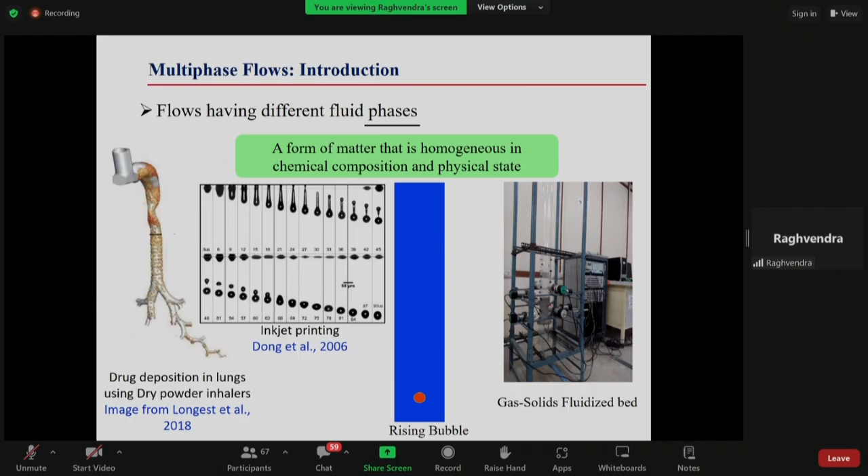That brings us to another set of reactors, called bubble column reactors. The bubble column reactor is a workhorse in the chemical industry, and I've introduced it here because it has a very simple structure that anybody can imagine. You have a column, where the blue color represents the liquid, and through a sparger, gas is introduced. So you have a pipe from where the gas is coming, and by some means you are distributing the gas at different points. It might be a plate, different holes in pipes, or a ring pipe — this is called a sparger — and from this you introduce the gas.

Depending on the gas flow rate, you can have a number of bubbles. The idea here is that when one needs to do gas-liquid reactions, in the pharmaceutical industry or chemical processing industry, this configuration provides a large interfacial area between the two phases, gas and liquid, which is where the reaction happens.

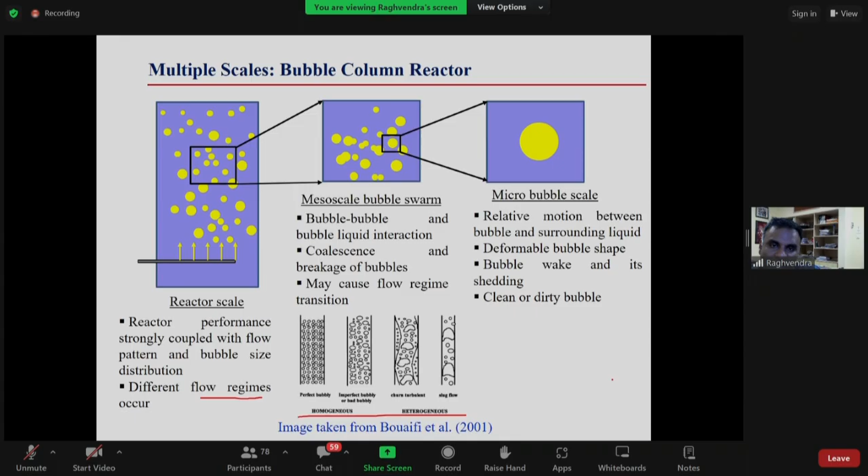So one needs to know that at what gas flow rates we will get what flow regime, and then you can model it accordingly, right?

So if we define multi-phase flows, they are complex and they involve interaction between different entities. Multi-phase means there can be more than one phase. It can be, say, gas and liquid phase. It can be liquid and liquid phase where these phases are immiscible.

So, for example, oil and water can be a multi-phase flow. And there can be gas and solid flow, there can be liquid and solid flow, or there can be gas, solid, liquid flow, or gas and liquid, or more than two liquids. So there can be different combinations.

Typically, what you will have is that one phase will be continuous and another phase will be dispersed into it. So you will have, for example, in the bubble column reactor, a continuous stream of liquid phase, and in that you have gas bubbles dispersed into it. So gas is the dispersed phase in the bubble column reactor, and the liquid is the continuous phase.

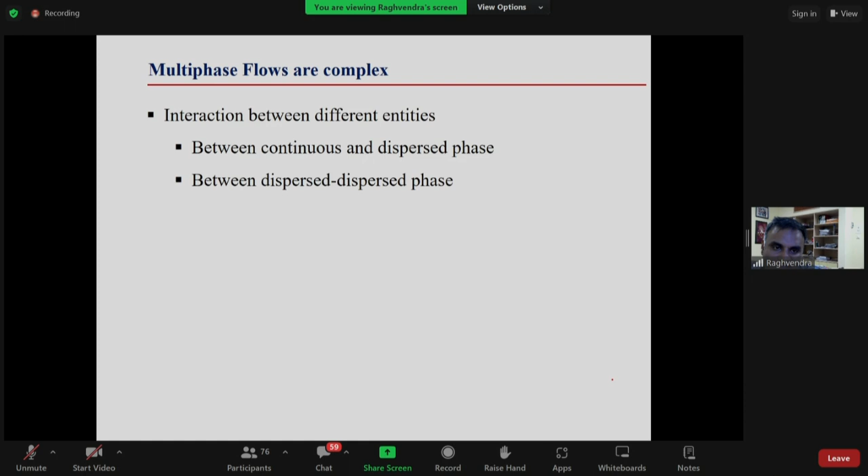Then you will have interaction between dispersed phases, so you will have interaction between bubbles. Now, most of these systems that we use in chemical engineering applications, or in any application, for example in conventional industry, the flow is turbulent. And turbulence you might have studied or heard about in a few previous lectures, if I am correct.

Then apart from the single phase turbulence factors, you need to also take into account particles and their motion. When I say particle, it might be solid particles, or it might be bubbles, or it might be droplets. How do they affect turbulence and how does the turbulence affect them? So the two-way interaction of turbulence and particles will need to be taken into account in your models.

The particle shape: most of the models that we have as of now assume the particle shape to be spherical, or they use correlations which have been developed for spherical particles with a correction factor for the shape. So that is irregular particle shape. The particle size will not be the same, so one needs to know the particle size distribution.

And then, as I showed you in the previous slide, there are different flow regimes, homogeneous bubbly flow or the bad bubbly, where you have smaller and bigger bubbles, churn flow and slug flow. So depending on the flow regime, your modeling strategy will change. So the transition between flow regimes is another challenge that needs to be modeled, because it might be difficult to use the same single approach to model all the flow regimes. And when you need to go from one flow regime to another, you need to be carefully weighing your options, what method to use.

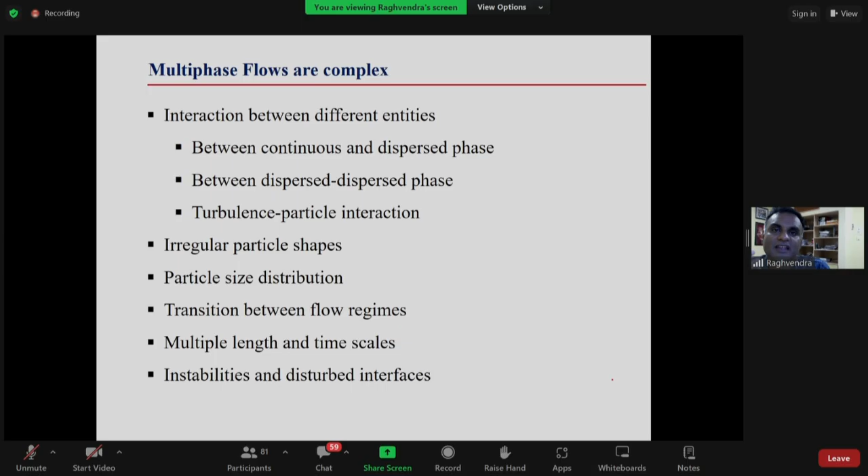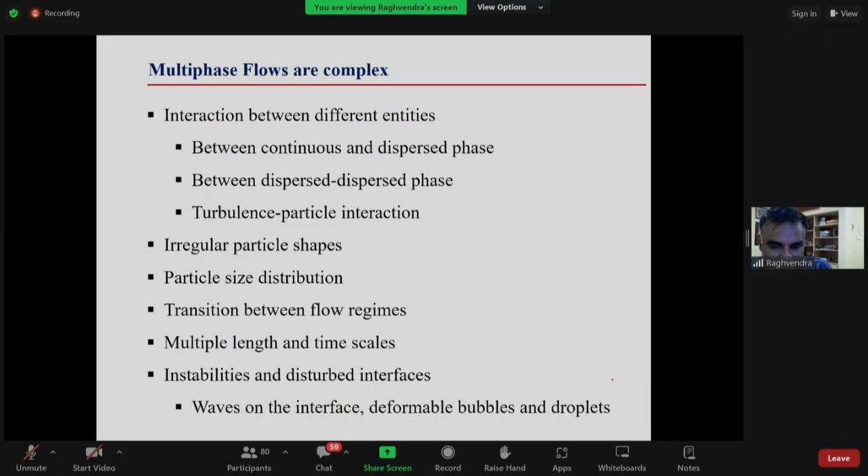And then on top of that, the flow is not always very calm. It has instabilities. A typical example is the waves on the sea. There are a number of waves, and those waves keep breaking. So the interface is disturbed, and this gives rise to different instabilities, for example Kelvin-Helmholtz instability or Taylor instability, and so on. So this gives you a background of what multiphase flows are and what the challenges are when you model multiphase flow.

So let us look at a two-phase flow system. When I say two-phase flow, I am talking about fluid phases, so it might be a gas-liquid system or liquid-liquid system. If you model this two-phase flow, what are the general equations? Let us assume that the flow is continuum. Only then can we write the partial differential equations, because the first assumption that we make in fluid mechanics is the fluid is continuum. Then the flow is incompressible, and we will see those equations for Newtonian fluid, but those things can be taken care of. For simplicity, we will also assume that there is no phase change.

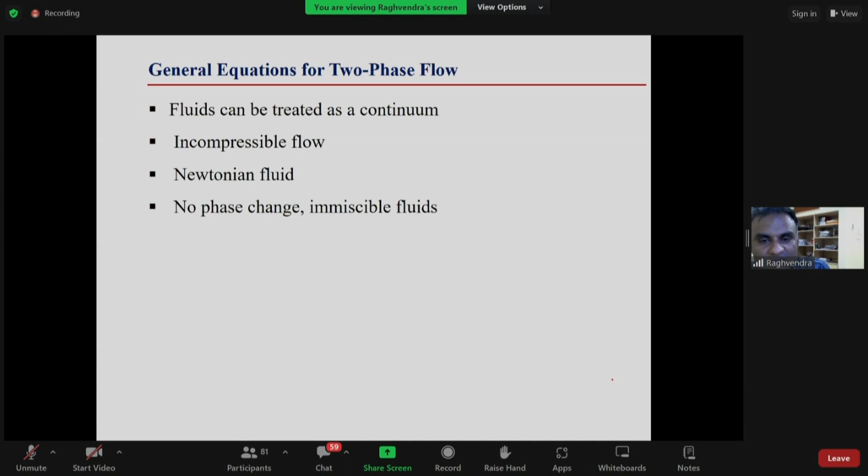The fluids are immiscible. So the mass conservation equation is the regular mass conservation equation, except that we have a subscript k in density and velocity vector. The bold here represents the vector. Similarly, the momentum conservation equation is our very familiar Navier-Stokes equation. You might have seen it in almost every lecture by now. Here F is the body force term, mu is viscosity, rho is density. So this also looks familiar. The only thing is that you will have to write mass and momentum conservation equations for each phase.

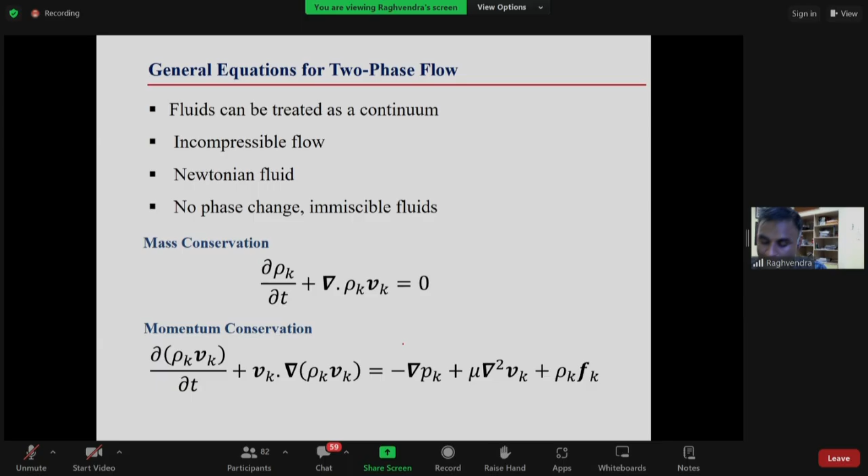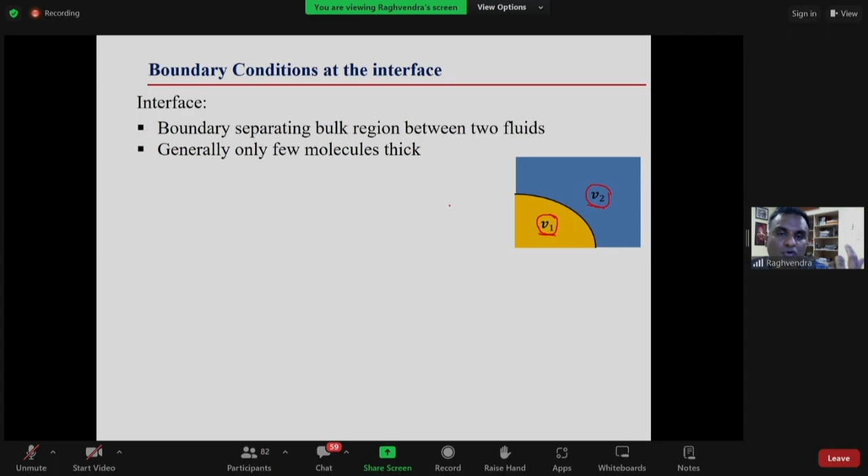Now, it is only a few molecules thick in reality, right? The first boundary condition we employ at the interface is that the velocity is continuous. The velocity component normal to the interface: if there is no phase change, then the velocity with which the gas is moving normal to the interface, with the same velocity the liquid needs to move. So the velocity normal to the interface will have to be equal.

Otherwise, what will happen? If they are not equal, that means there will be some void, which cannot be, right? Or something might need to be compressed. So it might change when we are talking about compressible flows, but for incompressible flow, this boundary condition needs to be satisfied. Now, the other condition is about the velocity tangential to it, meaning velocity along the interface.

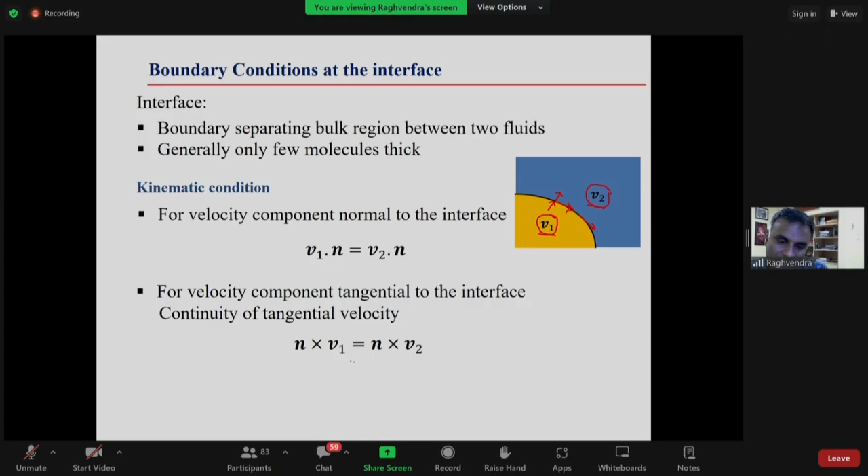At each point it might be different, right? So the velocity components tangential to it also need to be equal. That holds if the surface tension is constant. If the surface tension is not constant, then something called Marangoni stress will come into the picture, which we are not talking about. So if surface tension is constant, then the velocity tangential to the interface will also need to be continuous. So the velocities normal to the interface need to be the same at this point.

On this side and that side, the velocities normal to the interface are equal. The tangential velocities on both sides of the interface are equal. By both sides I mean just next to the interface, right? That is the boundary condition. So if the tangential and normal components are equal, then the velocity vectors need to be equal. So velocity continuity is the first condition, which we call the kinematic condition, because there is no force that we have talked about.

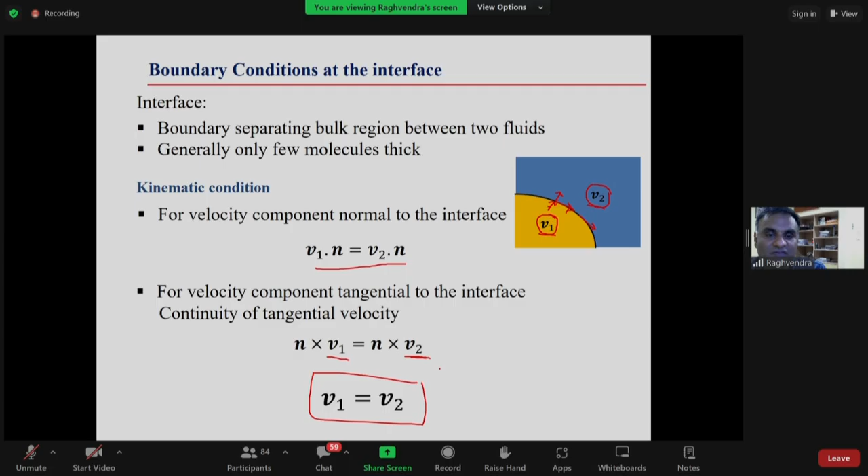So let us talk about the other condition, which is the dynamic condition, where dynamic refers to when we also take into account the forces that the fluid experiences. In our system, we have two kinds of stresses, normal stress and viscous stresses, like we had normal and tangential components of velocity. So normal to the interface, you will have viscous normal stress or pressure.

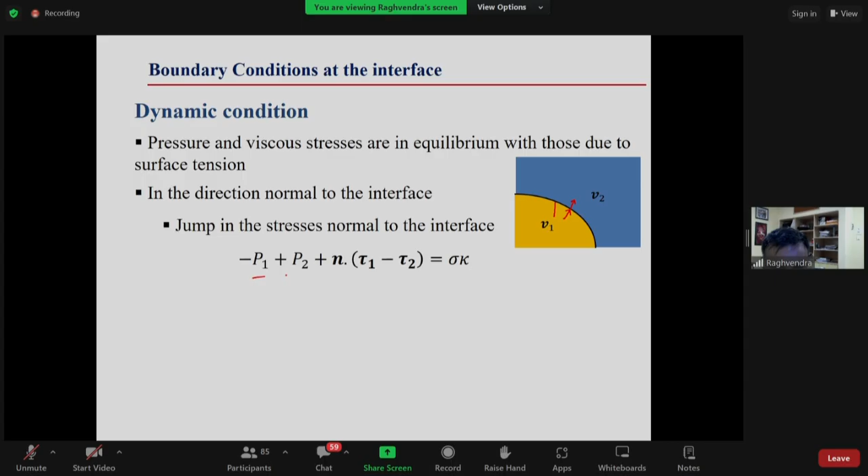When we read about the Young-Laplace law, what is the pressure difference inside and outside the bubble? You might have done the problem of pressure difference across a soap bubble, 2 sigma by r, and so on. That is the pressure difference between inside and outside, for a stationary bubble. What we have here is pressure difference plus n dot (tau 1 minus tau 2), so if there are viscous normal stresses, they are also taken into account.

So the difference of normal stress is equal to sigma kappa. Kappa is curvature. The curvature of the interface for a bubble will be 2 by r. So for stationary bubbles in a liquid, you will have delta P equals 2 sigma by r, which we all know as the Young-Laplace equation, right? So that is our boundary condition for the interface.

Now, in the direction tangential to the interface, again we will have this, where sigma is surface tension. Now you have a gradient of surface tension. If we say that there is no gradient of surface tension, then this is 0, so tau 1 is equal to tau 2. That means the tangential stress needs to be equal. N cross tau 1 will give you the tangential stress. So the tangential stress on this side and that side will be equal. If you have a surface tension gradient present, that will be different, so we will not talk about those, to simplify things.

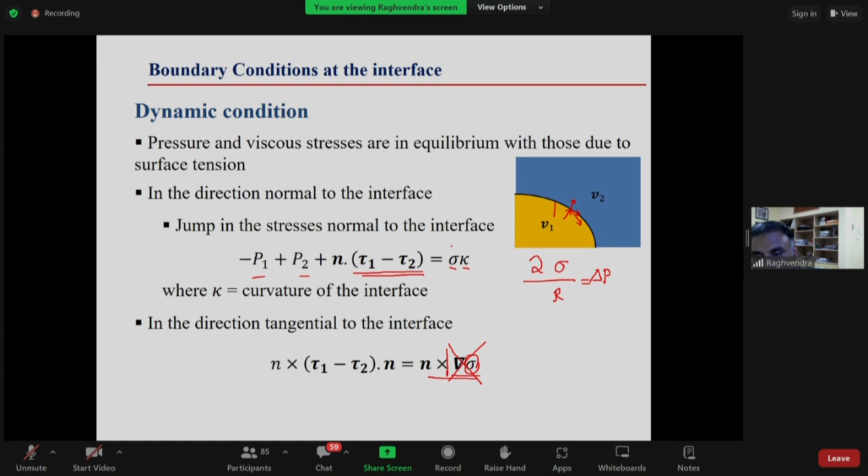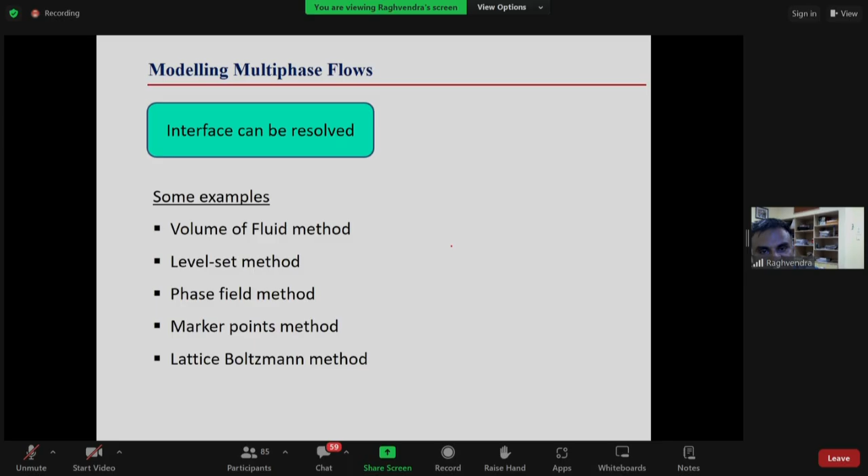Okay, so we have talked about the kinematic condition, which says the velocity should be continuous across the interface, and the dynamic condition, which says the tangential stress should be equal on both sides, and the normal stress should be balanced by surface tension, or delta P equals sigma kappa. Those were the general equations for two-phase fluid flow. Depending on the system you are studying, there can be different approaches. One approach is where the interface can be resolved, and the other is where it may not be possible to resolve the interface.

So let us take an example. We were talking about a droplet being released from a printer, right? We had this printer nozzle head, and from there a droplet is being released. So this droplet is coming, and surrounding it there is air all around.

And we will need to know what is the shape of this droplet, how does it go and deposit on the paper maybe. So all those things need you to capture the interface between the phases. So here, that's what it means, that interface needs to be resolved because we have only one droplet and another droplet coming at another time.

But if you need to model flow in the entire bubble column reactor where there are millions of bubbles, now it becomes difficult to model all those bubbles because the condition in these systems is that when you are resolving the interface, you need at least 10, 10, 10. Let us say generally you need 20, 20, 20 or 15, 15, 15 cells across the bubble. So you need 10 grids across this side, 10 grids across this side, 10 grids across this side. So that means 10 raised to the power 3 number of elements for one bubble.

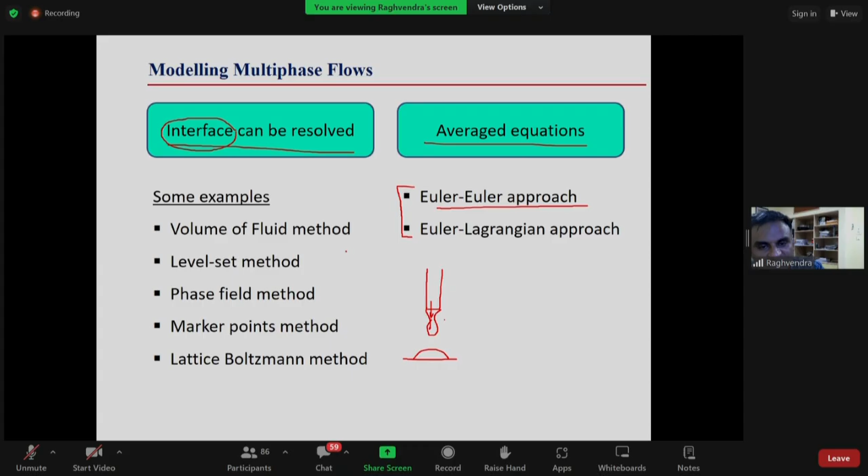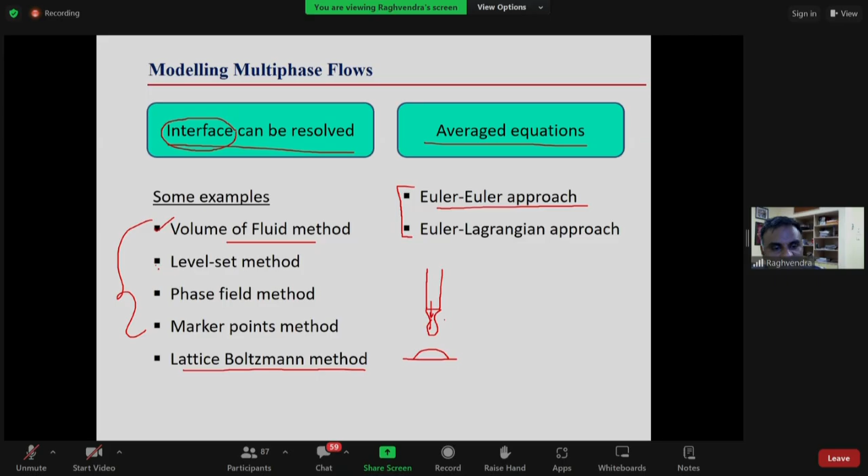So there are different interface capturing methods where you can capture or resolve the interface and model this flow. Some of those I have listed: volume of fluid, popularly known as VOF. You can use the interFoam solver in OpenFOAM for the volume of fluid method. Then you have the level set method, phase field method, marker points method. And then there is an entirely different approach to model fluid flow, which is not using Navier-Stokes, but can also be used to model multiphase flows, which we call the Lattice-Boltzmann method. So we will be talking, in general, about the approach in all of these, and then briefly about what VOF involves and what is involved in the level set method.

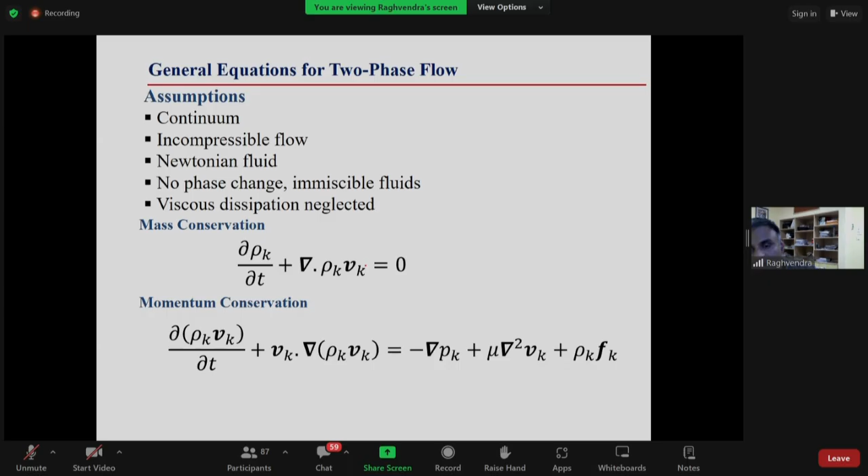So let us look at the equations again. These are the equations that we talked about, and these are the boundary conditions that we talked about. So these methods are also called DNS. You might have heard of DNS in a different parlance when people talk about turbulent flow. Then DNS is a popular term, direct numerical simulation, because to model turbulent flows, you need to capture all the time and length scales, the phenomena happening at the smallest possible scales of time and length.

So if you can do that, that is called direct numerical simulation, and you don't model anything heuristically or empirically. Here, because we are capturing the interface, we are not using any model that is empirical in nature. Everything is coming from first principles. So these methods, volume of fluid or interface capturing, interface tracking methods, they are also called DNS methods.

Now you might see two terms used interchangeably: interface capturing and interface tracking. If you have an interface and a grid, some methods, for example VOF, might tell you what my volume fraction is. It might tell you that the volume fraction in this cell is 0.5, in this cell is 0.9, and in this cell is, say, 0.1. But it will not tell you what my interface is exactly. So you need to construct the interface. Such methods are called interface capturing methods.

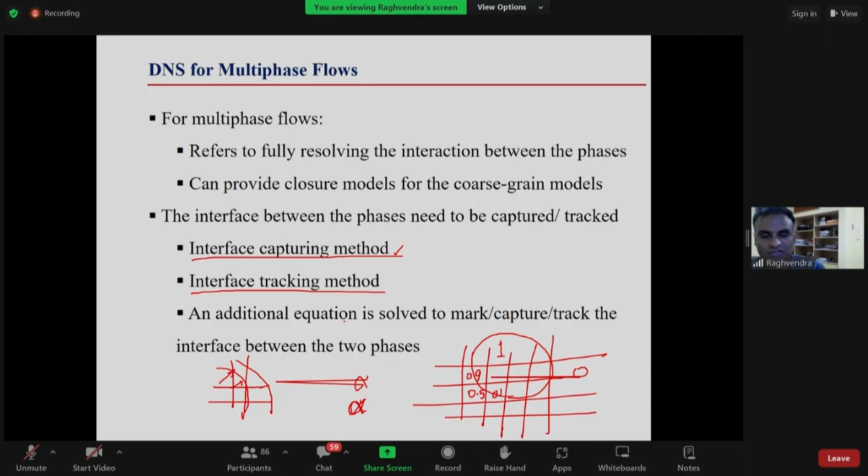Now, interfaces can be 2D or 3D depending on what kind of simulations we are talking about. A very common example of an interface is an annular flow. Annular flow is when you have a pipe with a gas-liquid system inside. If the liquid is flowing and you have a very large velocity of gas, the liquid will be on the wall as a thin film, and there will be gas phase in the core. This is an annular arrangement where liquid is flowing in the annulus - it might be a gas-liquid system or a liquid-liquid system. In such cases, you can have a smooth interface flow, bubbles flowing through the system, or thin films.

Now these interfaces need to be modeled or captured, and their motion needs to be captured. So as I said, we will have a marker function. This marker function can be 1 in fluid 1 and 0 in fluid 2.

How the motion of this marker function works: del C over del T plus V dot del C is equal to 0, where V is the velocity field. If you remember, del over del T plus V dot del, all this is the material derivative, which represents how C is traveling with time. So this material derivative of C equal to 0 represents the motion of C.

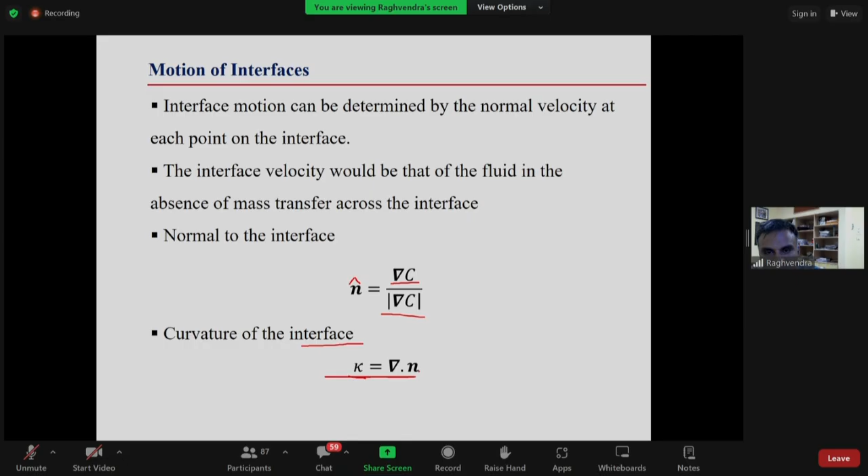Now what is done in these interface capturing methods is that one uses a single fluid formalism, or one fluid approach, which means that even though you are modeling flow of two phases together, you solve only one set of conservation equations. So if it is isothermal incompressible flow, you are solving one mass conservation equation and one momentum conservation equation. Let us look at what is different in this.

This appears to be very similar. These terms also appear very similar to our familiar single phase Navier-Stokes equation. This was there, this was there, this is our body force. This is a different force which has come in - we will talk about this FSV.

Let us remember that. The other doubt you might have is that this is a two-phase system - I have gas and liquid. Now what rho will I use here and what mu will I use here? Because there are two phases, gas and liquid, and mu is viscosity - so which viscosity, which phase?

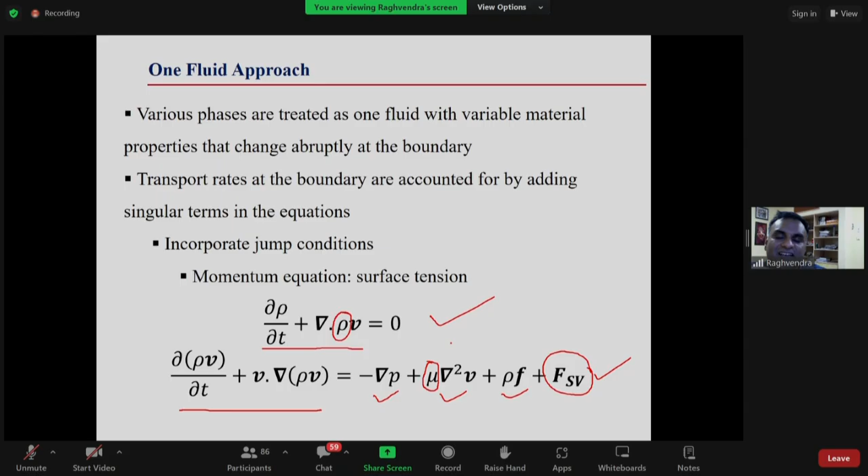The answer is already there, because we have already talked about the marker function or indicator function, which marks or indicates whether I am in the gas phase or the liquid phase. If C is equal to 1, I am in phase 1; if C is equal to 2, I am in phase 2. If I am in phase 1, I will use rho is equal to rho 1. If I am in phase 2, I will use rho is equal to rho 2. So the next question is, what if I am at the interface?

What we could do is write these as volume fraction weighted averages. So rho is equal to rho 1 alpha 1 plus rho 2 alpha 2, and mu is equal to mu 1 alpha 1 plus mu 2 alpha 2. Remember that alpha 1 plus alpha 2 is equal to 1 if you are using the 1 and 0 concept, where 1 and 0 also represents the volume fraction. So this gives you the volume fraction weighted average.

Now, if you are in phase 1 where alpha 1 is equal to 1 and alpha 2 is equal to 0, you will effectively have rho is equal to rho 1, since alpha 1 is 1 and alpha 2 is 0. Similarly, mu is equal to mu 1. On the other hand, if you are in phase 2, rho is equal to rho 2. Now if you are at the interface where maybe alpha 1 is equal to 0.5 and alpha 2 is equal to 0.5, then rho is equal to rho 1 plus rho 2 divided by 2. So you have these relationships for mu and rho.

Now let us go back to those equations. The challenge in these equations is that you need a marker function, because you need alpha and rho. We have already talked about how the marker function is defined initially, and then it has to be found, or calculated. For calculation, you need an equation.

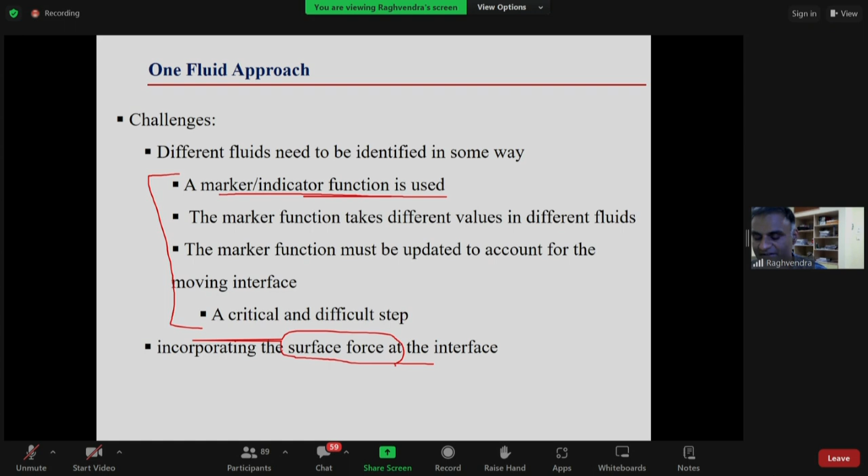And this surface force is only non-zero at the interface. Everywhere else, there is no surface tension. So how will we incorporate it? We will add this in our system of equations as a body force. This is what this surface force was, FSV, or surface force approximated as a volume force. And there is a model proposed by Brackbill et al., called the continuum surface force model. So you are modeling this discontinuity in the surface force in the continuum system of equations. If you look at the system of equations, all terms are force per unit volume.

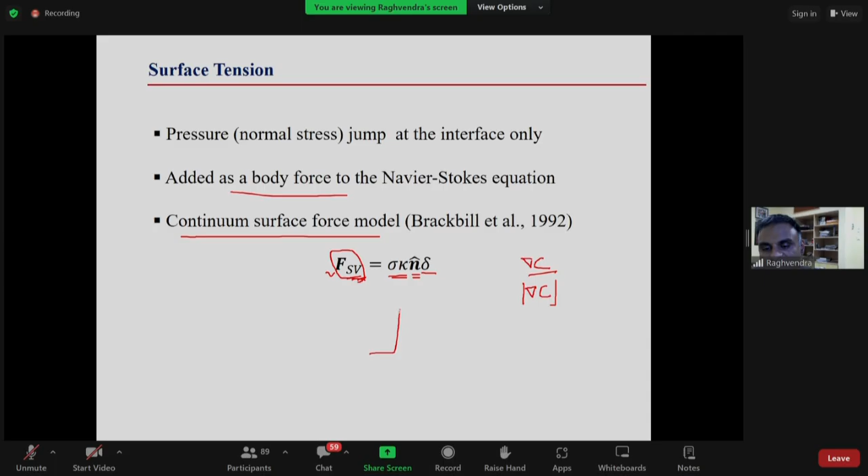So you model it as sigma kappa, which will be your delta P, in units of pressure. And then you are saying that this is the direction. What is the direction? Unit normal. Remember we have already talked about how to model this unit normal, grad of C over mod of grad C. And what is this delta? Delta is the Dirac delta function, which is non-zero only at the interface. So this is your interface.

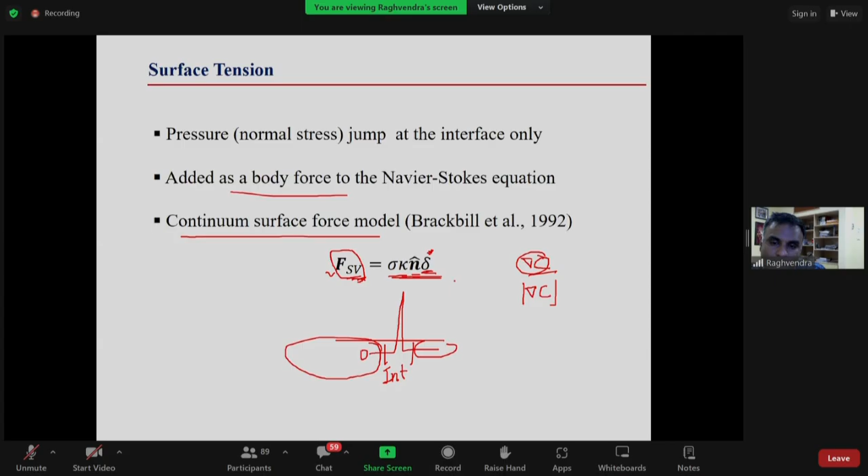It is zero everywhere and non-zero only at the interface. So that means this force will be zero everywhere, only at the interface will it be non-zero. So one can also calculate this, or write this in terms of C. So if you write this using the C value, the grad C, if you look at grad C, what is grad C? The gradient of the marker function. The marker function on this side will be, say, 0. On this side, it will be 1. So gradients will be 0 here, gradients will be 0 here. Only here it will be non-zero. So you can model this FSV in terms of C and grad C, right? So we have got the expression for the surface force model.

Now we can use different approaches or different methods. What is different in different methods is the marker function we use. So in the volume of fluid method, we use what we have been talking about, that the volume fraction is the marker function. So it will be 1 in phase 1 and 0 in phase 2, which is the volume fraction of phase 1. Then there is the level set method, where we use a level set function, and we will not be talking about the phase field method.

So the advantage of the volume of fluid method is that because you are writing the conservation of, or writing, the volume fraction advection equation, which is also conservation of one phase, mass of the phase is inherently conserved. So that is good news here. But the problem is that the cell value is diffused over few cells. So your interface is diffused over a few cells. Physically, the interface should be very sharp. But this discontinuity will be modeled as diffused over few cells. So you need to use some special treatments to make sure that your interface remains sharp.

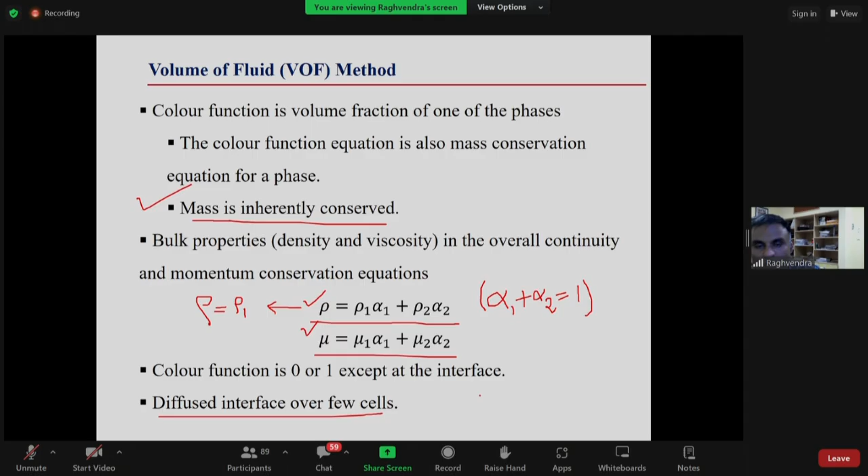So in OpenFOAM, there are different techniques that have been developed, and different software uses different methods. So this is not interface reconstruction, by mistake it is there. In OpenFOAM, what is used is a compression term. So this is your volume fraction advection, where alpha is the volume fraction of the phase. And there is another term which comes from purely numerical considerations.

If you look at this term, if alpha is 0, then this term is 0. If alpha is equal to 1, this term is 0. This term will be there only at the interface. And this VR is the relative velocity, which comes numerically using this formula. C alpha is something which gives you control over it. If you substitute C alpha is equal to 0, then this term will become 0, and then you are not using compression. Otherwise, if you use C alpha equal to 1, you will have typical or conservative compression.

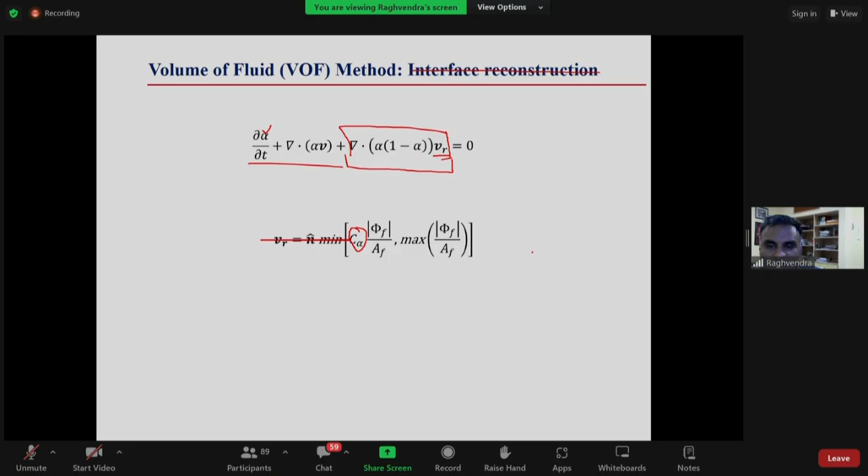Otherwise, you can use higher values, say 2, 3, up to 4, for the value of C-alpha. This is to keep your interface sharp, not diffused. It might not look like a very diffused interface. Now there are implications of this, which I don't think there is time to discuss.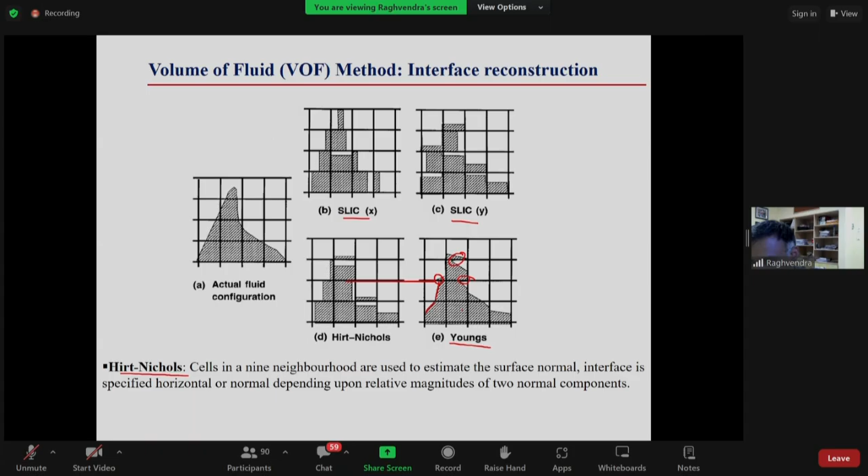Now there will be a pressure jump across the interface. Depending on how well we model this pressure jump, it should be 0. But the problem comes in the calculation of kappa, which is the curvature. So sometimes, in many implementations of the volume of fluid method, one sees these velocity vectors, as you see here, these recirculations or oscillations around the interface. There will be oscillations in pressure as well as the velocity field, and these are called spurious or parasitic currents, associated with the volume of fluid method.

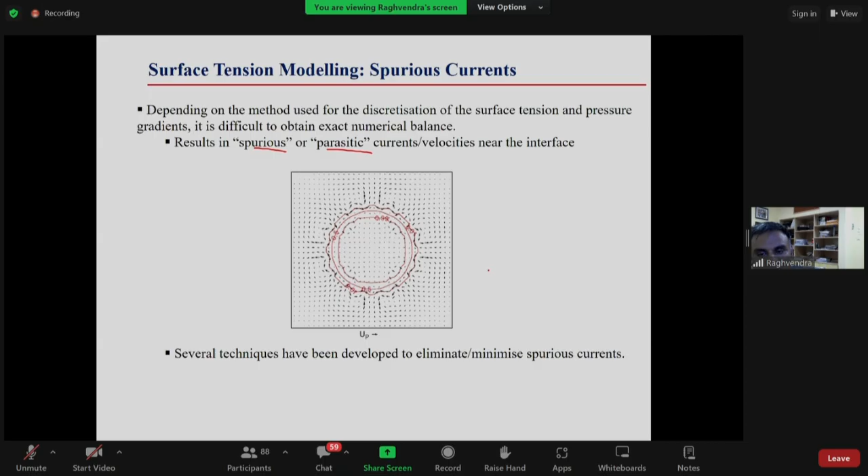So one of the efforts that one needs to make, or needs to be careful about, is that these spurious currents are minimized.

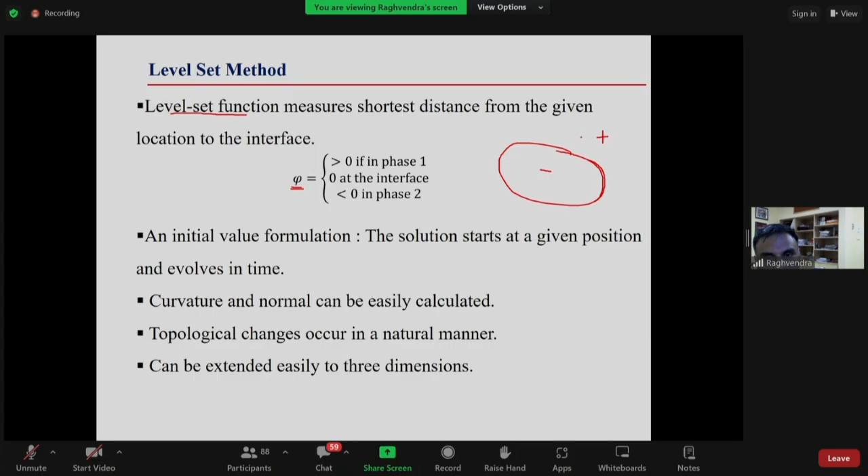Now, just for 2 minutes, I will briefly describe what is the level set function. Here, if you have an interface, the level set function phi is defined such that it is positive in phase 1 and negative in the other phase. That means the value of phi is 0 at the interface. This function is advected using a similar kind of equation: d-phi/dt plus v dot grad phi equals 0. That is how you advect this.

Another problem with the level set method is that the interface will not be inherently conserving. The mass of the phases on both sides of the interface may not remain the same. So the value of phi needs to be reinitialized after a few time steps.

But the advantage of the level set method is that it gives you a good normal to the interface. The normal to the interface calculations are accurate. As a result, your surface tension calculations will be accurate, and you can minimize the parasitic currents we just discussed. So that is, in short, the level set method.

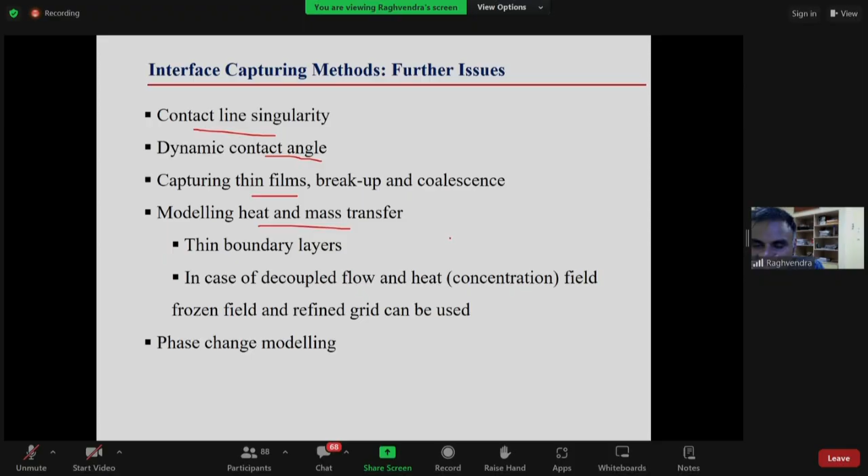Sir, in your previous slides, in the level set method, you showed alpha in the form of phi. So while combining the level set method and VOF method, do we use that alpha to combine both equations to get a combined level set? No, we will not necessarily use that alpha. I don't remember exactly what is used in coupling those, but I don't think you will use that alpha for combining the two, because you are solving the volume of fluid method already, and then you are using this level set method to identify the interface. So it has to be connected with how you reconstruct the interface. How people have used it needs to be looked into, but I think from alpha, one will calculate phi probably.

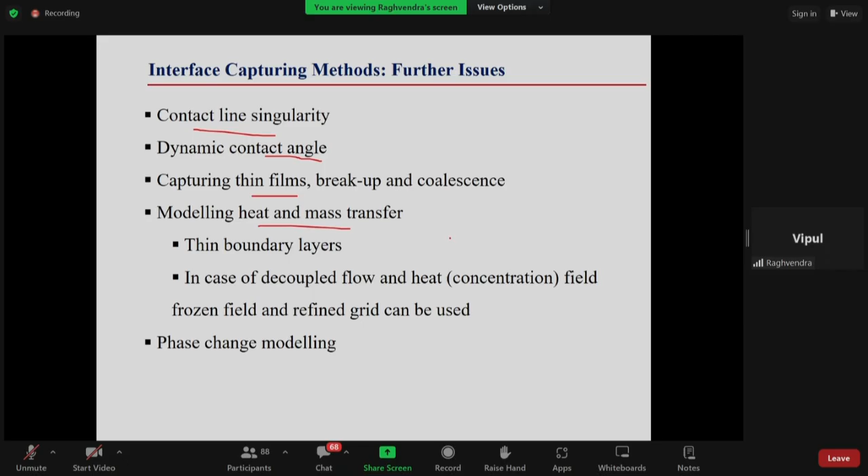Sir, can you please explain again that slide in the level set method? What I am talking about is, if you look at this, phi is either positive or negative, and we will need the volume fraction for calculation of bulk properties, density and viscosity, and so on.

So we will need the value of alpha. So alpha is 0. The thing is that at the interface, if you take a discontinuity, then everything will be very problematic, because density, say for example, 1 to 1000, will be changing, and then you have a lot of discontinuity there. So you will need to change this. It will not be a sharp change. The change will not be sharp, but rather a continuous change, right?

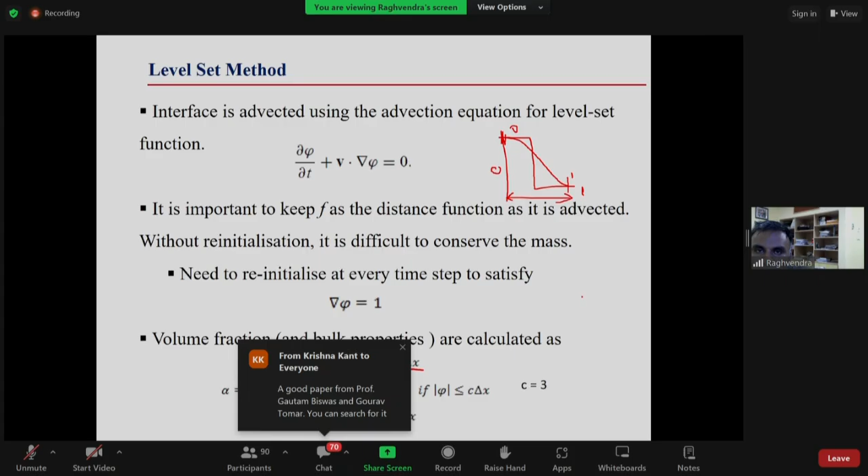Sir, you have taken C is equal to 3, sir. Yeah, that is a model parameter: how sharp you want to have this interface. That is a numerical parameter. Okay, sir. Thank you, sir.

Sir, what sort of turbulence model should we use based on a given problem? What things should we consider? And what are the important parameters, like CFL number, that we should consider for the mesh size? Of course, you will need to take into account CFL number, but CFL number is for convection. Here, you will also need to take into account the time constant from the surface tension perspective and from the diffusion perspective. Diffusion you consider even in other cases, but here you will need to take into account the time constant from the perspective of surface tension also.

So somebody had suggested Professor Biswas and Professor Gaurav Tomar's paper for the CLS-VOF method. You can look at that paper. Can we use adaptive mesh refinement to get the interface correctly, or is there a problem in using that? You can use adaptive mesh refinement. That will be helpful if you don't want to use a refined grid everywhere; it will help you in reducing the grid size.

But the problem there is that the adaptive mesh refinement should be dynamic, except in cases where you know that your bubble or droplet is going to be stationary, because you want the interface to be sharp. For that, you need the refined mesh near the interface, right? But if it is moving, then you need to make sure that the refinement is continuously happening and there is no change in the grid size at the interface. Otherwise, it might be a problem.